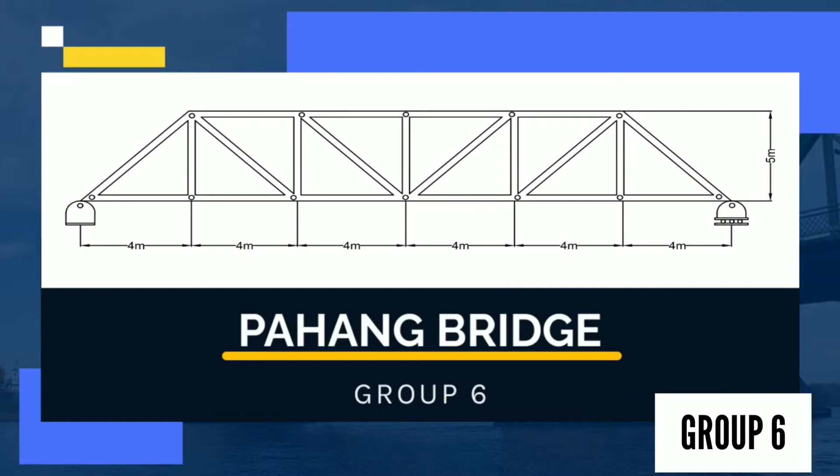Assalamualaikum. My name is Muhammad Hakim bin Muhammad Jinnah and my matric number is CN200196. Hi, my name is Sharifah Adrianism Said Muhammad Ridwan and my matric number is CN200075. Assalamualaikum warahmatullahi wabarakatuh. My name is Nur Naimah binti Kasroni and my matric number is CN200174. Hello everyone, my name is Nuri Nadia binti Ashar with matric number AN200223. My name is Muhammad Akmal bin Muhammad Nizam and my matric number is CN200258.

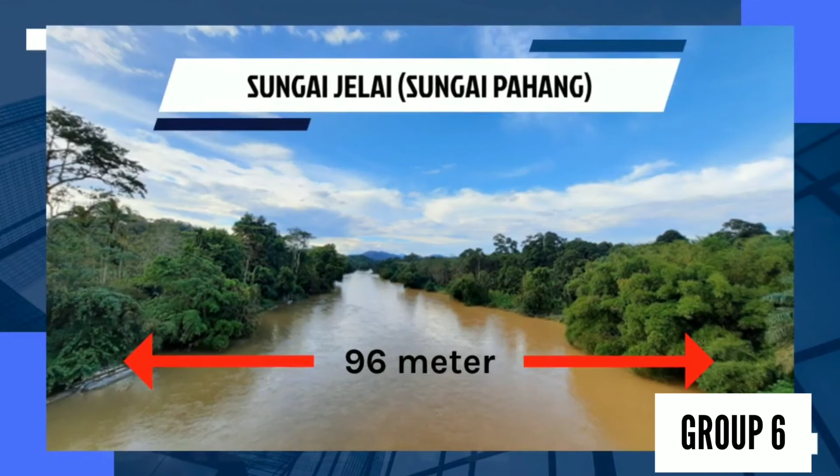For this project, we decided to use the river located at Kampung Kuala Medang, Pahang, which is called Sungai Jelai, to create our new bridge design. For your information, the Pahang River covers almost all districts in Pahang, including Sungai Jelai itself. Pahang River, or in Malay we call it Sungai Pahang, is a river that flows through the state of Pahang, Malaysia. With a length of 459 kilometers, it is the longest river in Malaysia.

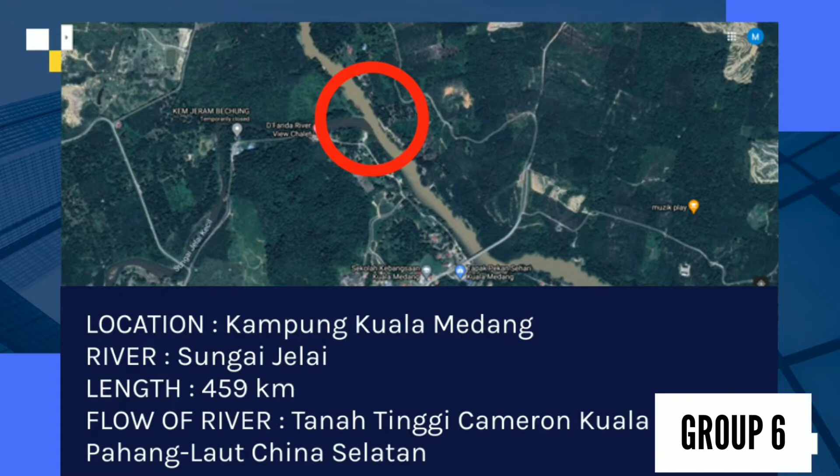The flow of the river starts from Tanah Tinggi, Cameron, next to Kuala Pahang, and then ends at the South China Sea, or in Malay we call it Laut China Selatan. Originally, the distance between the village and town of Kuala Medang to the old bridge is about 1.54 kilometers. So, the distance between the village and town of Kuala Medang to our new bridge is about 992 meters only. These are a few shots of scenery at Sungai Jelai.

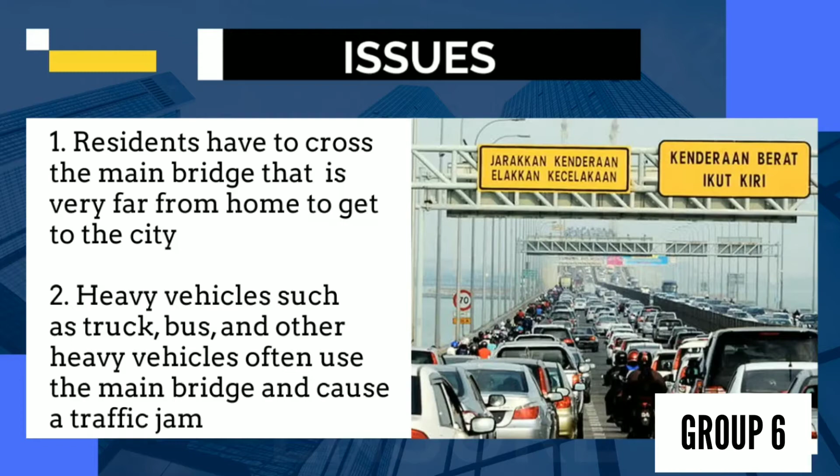In this project, we discovered new issues regarding the problems occurring at the existing bridge. Firstly, traffic congestion often occurs as the school, SK Kuala Medang, is built near the bridge. In addition, there is also the Kuala Medang day town site. It's a gathering place for the community there. The situation at peak hours is a concern with the increase in vehicles such as school buses, cars and motorcycles that gather to pick up students, as well as economic activities that take place at the day town site. The construction of the new bridge will provide another alternative to road users and can prevent congestion and also accidents.

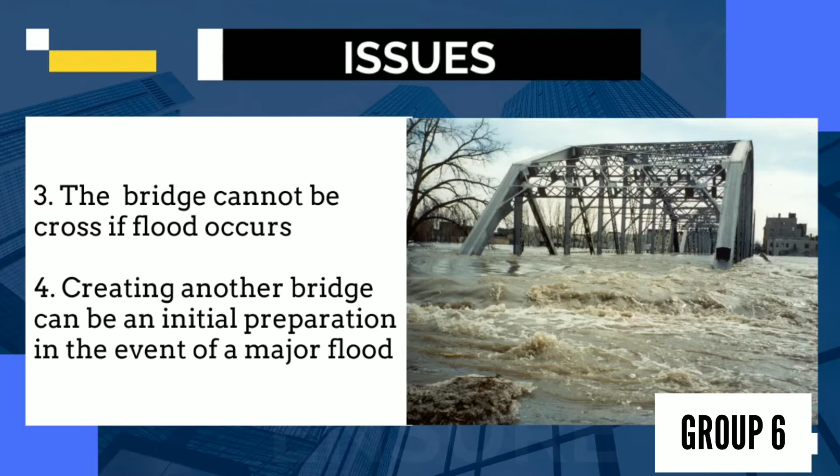Besides that, this river is usually associated with two phenomena, namely river floods and flash floods. The devastating and unusual floods that frequently hit the east coast area have caused Kelantan to be severely affected, as well as several districts in Pahang and Terengganu. The construction of this new bridge can be an initial preparation in the event a major flood causes significant damage to the original bridge. If that happens, this new bridge will be another alternative way to connect the two areas.

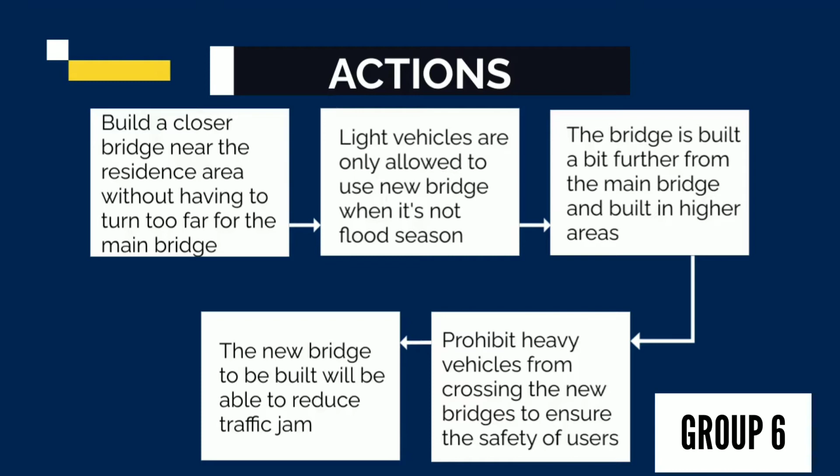There are several actions taken for the new bridge. First, build a closer bridge near the residential area without having to travel too far to the main bridge. Then, light vehicles are only allowed to use the new bridge when it's not flood season. Third, the bridge is built a bit further from the main bridge and in higher areas. Fourth, prohibit heavy vehicles from crossing the new bridge to ensure the safety of users. Fifth, the new bridge to be built will be able to reduce traffic jams.

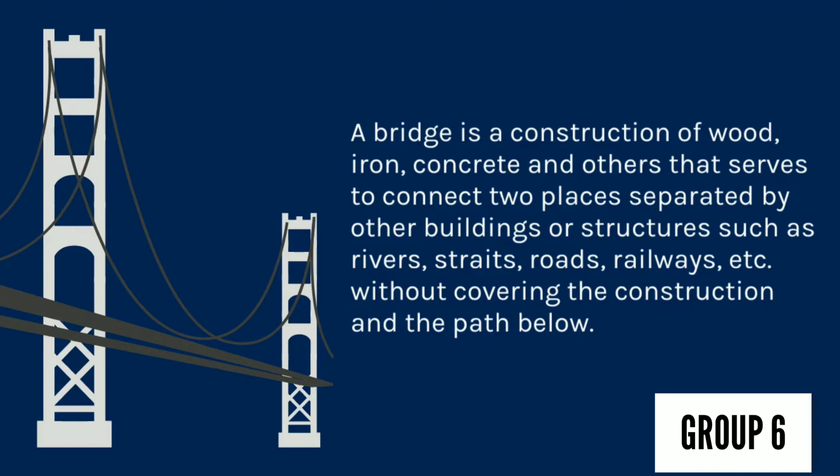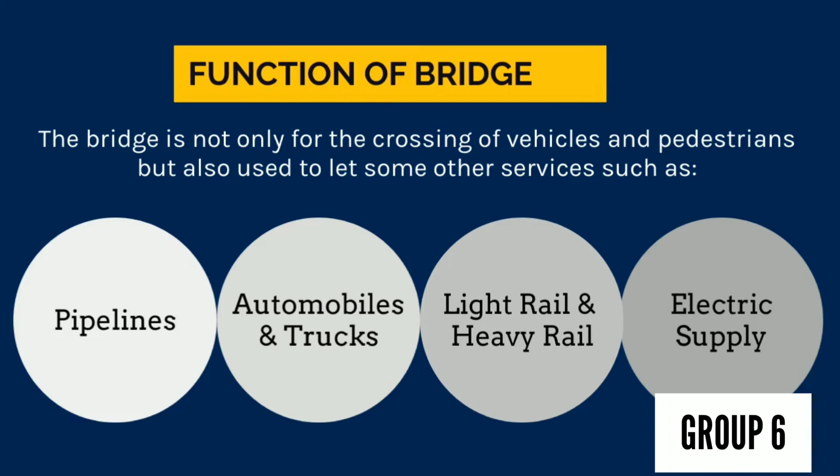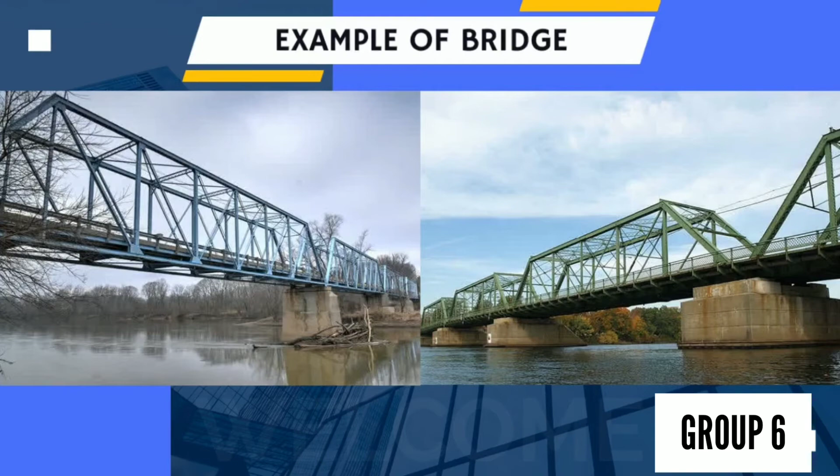Okay, now I will explain about our bridge design. In this bridge design, we have used a Pratt truss, which is the strongest truss compared to the Howe and Warren truss. The common materials used for trusses are usually timber, iron, steel, reinforced concrete, and pre-stressed concrete. As for the live load, the bridge carries pedestrians, automobiles such as cars and trucks, and any other heavy vehicles. For the dead loads, the bridge carries its own weight of truss components, pipelines, and more.

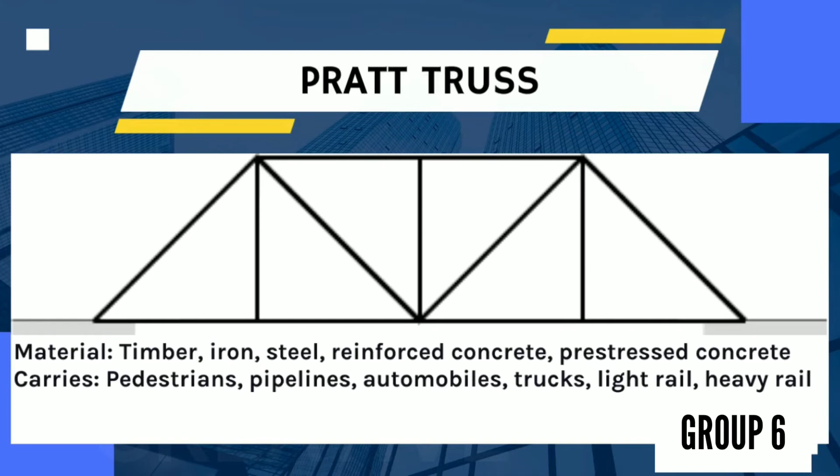Here are the advantages of using Pratt truss design. Firstly, the design is extremely strong. Secondly, it uses materials effectively. It is also common as it is a well-accepted and used design. Pratt truss design can also withstand extreme conditions. And lastly, roadways can easily be built onto structures.

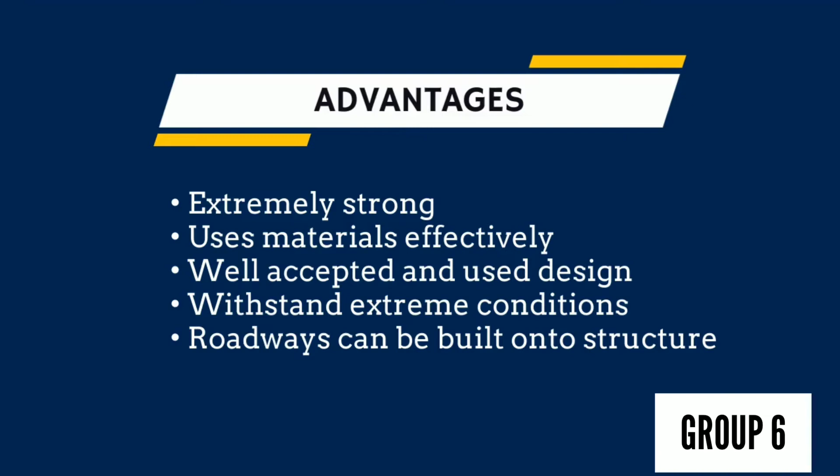By using Pratt truss design, there are also disadvantages: it requires a lot of space. It also has a high maintenance cost, and what concerns us is that the number of trusses is a lot, which can make the bridge too heavy.

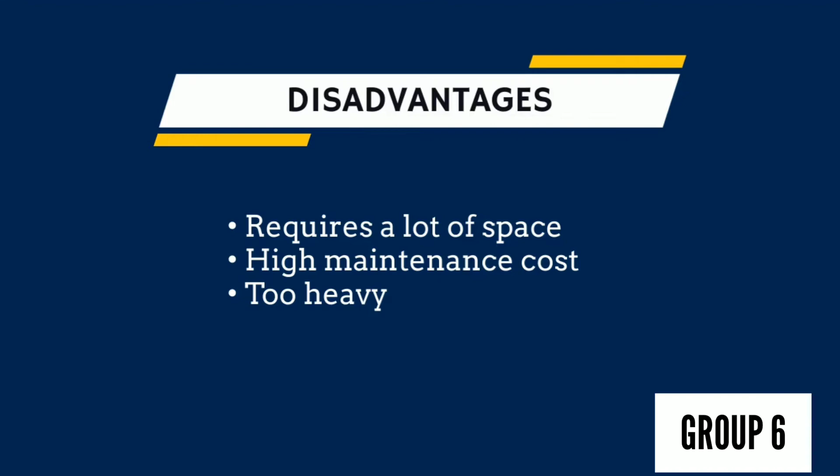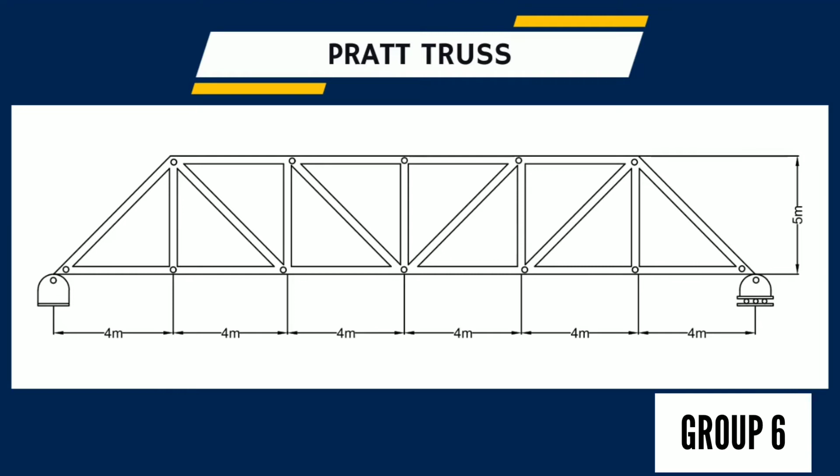Now this is our entire bridge drawing. This bridge has 4 spans and each span has 6 parts of joints where the trusses are connected. We have put a pin support at A and a roller support at L. The total number of members is 21. And every joint of the trusses we have labeled with letters, A, B, C until L.

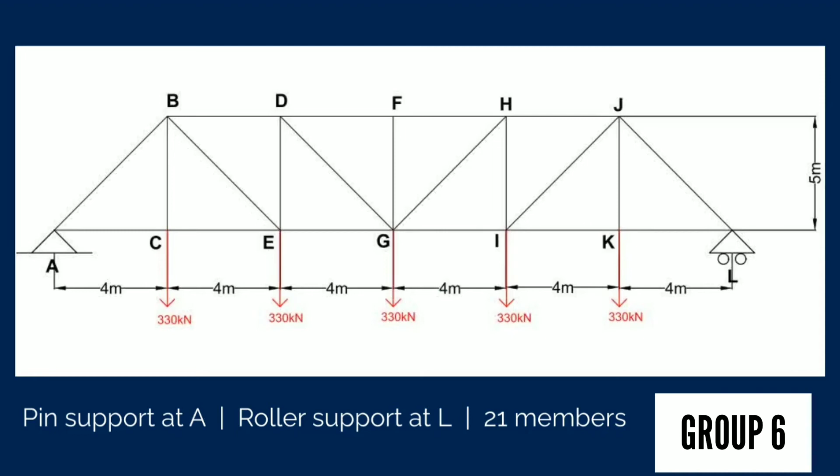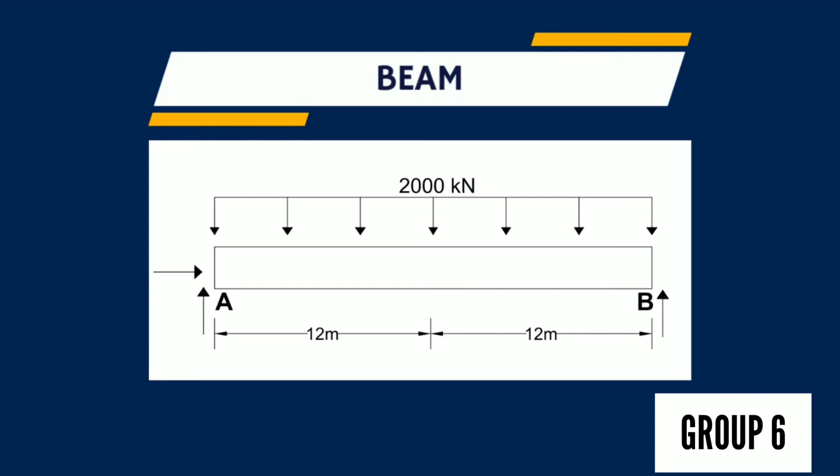For my part, I will explain the bridge calculation. For this calculation, we will calculate the moment and each part of the truss. As you can see, the beam length is 24 meters and the full load, including dead load and live load, is 2000 kN. For the next slide, I will show how we get the max load and the moment of the beam.

But we just need to count one part of the bridge only, and we multiply it by 4 parts of the truss because our truss has 4 parts, and get 2000 kN for one part of the bridge. Each truss has 6 parts. The value we divide by 6 and we get the total weight for one part of the bridge is 333 kN.

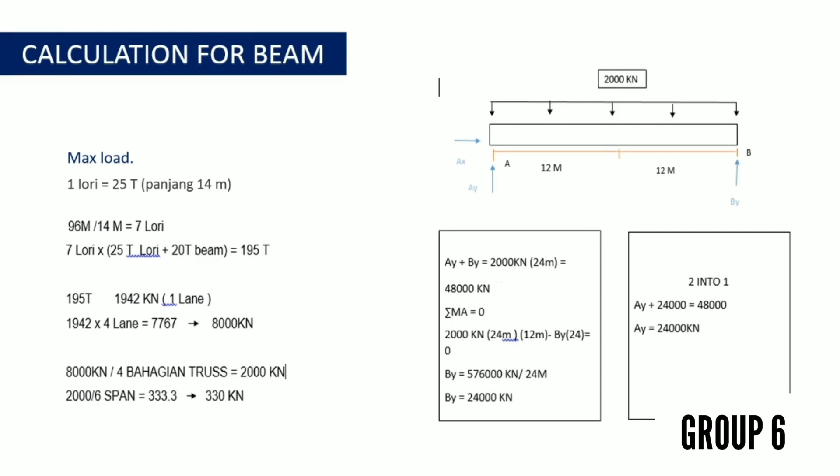To calculate the moment, we multiply the total load, which is 2000 kN, with the beam length, which is 24 meters, and the total is 48,000 kN. Then the total is subtracted: 48,000 kN minus 24,000 kN, and we get 24,000 kN to get Ay.

Now, I will explain the calculation on each truss member. The angle I set for this through bridge is 57.5 for the same angle as AB and 32.5 for the same angle as BK. First of all, to find the sum of AB, the total load will be divided by an angle: 330 divided by sin 57.5, and we get 391 kN for the load in AB.

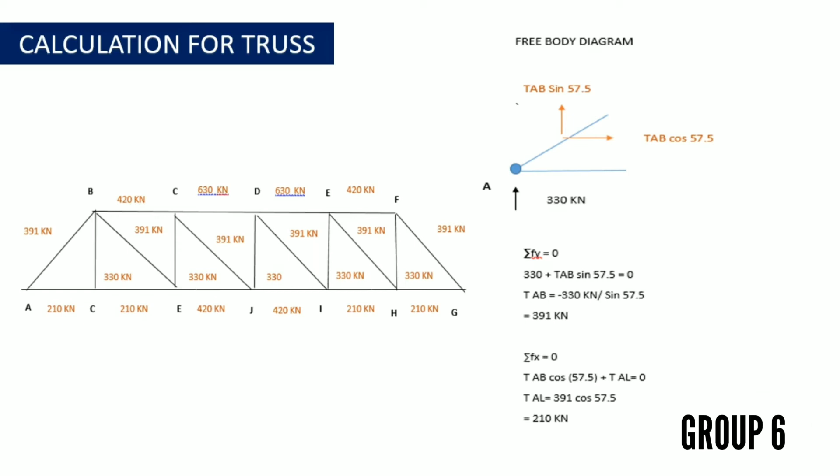All loads for the same bar truss will be the same load, as BK, CJ, EJ, FI and FG. For the AL load, the AB load, which is 391, will be multiplied with cos 57.5 to get 210 kN for the AL truss. Next, the BK truss is the same as the AB truss: we divide the load 330 kN by cos 32.5 and we get 391 kN for the BK truss.

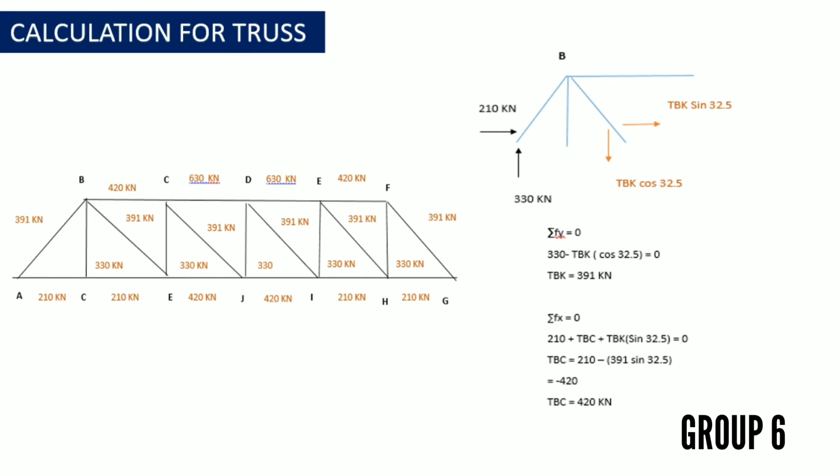For the BC truss, the load of AL will minus with the BK truss, which is 210 minus 391 sine 32.5, because of the angle to the x-axis, and we get the total load for BC is 420 kN. For the CJ truss, its calculation is just the same as the BK truss calculation. For the load in the KJ truss, the total of AL and LK is taken because the KJ truss accommodates the load of these two trusses, and the load for KJ is 420 kN.

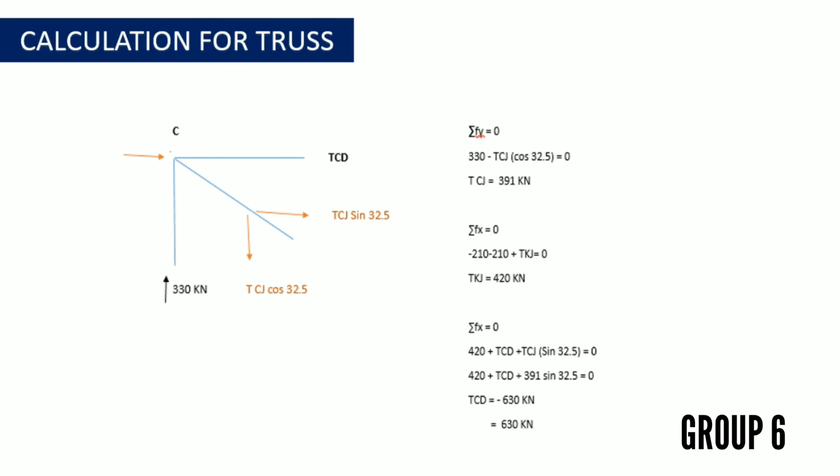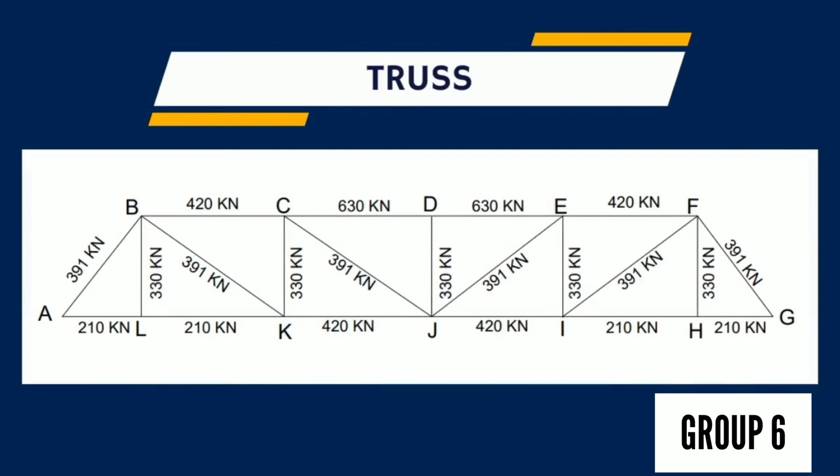Lastly, for the CD truss, the total KJ load will minus with the CJ total load, which is 420 kN minus 391 kN sine 32.5, and the total load is 630 kN for the CD truss. The total loads of DE, EF, FG, GH, HI, IJ, EJ and FI are just the same as the calculations because they have the same load and the same angle.

Okay, lastly is the conclusion. In conclusion, this project has allowed us to understand load distribution in a structure, such as load, section and joint. It is because truss structures are considered to be one of the most useful structures in our daily life, such as for a bridge, tower, roof and so on. This truss structure has also become fruitful in stability consideration as well.